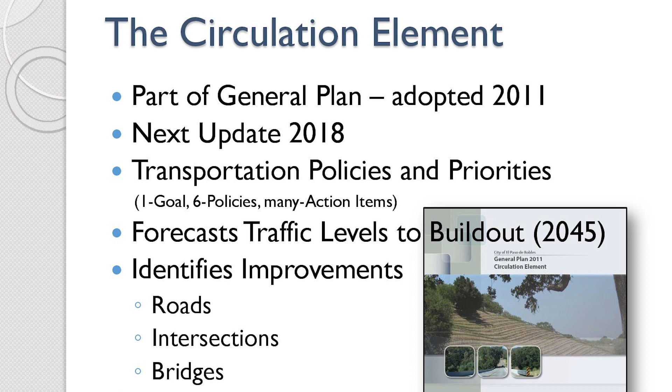So the circulation element also forecasts traffic levels to build out. We look at the baseline. Today is the baseline—actually it was last year. 2017 is our baseline. We did traffic counts throughout the city.

We're going to take those traffic counts, the number of trips per day, how many times you folks all go around and do your daily business, and we stick those in our traffic model, and we look at how that traffic is going to grow into the future. And so we've done that now, and we've done it out to 2045.

And then really we do that so we can identify higher level improvements, really the nodes, where do the big roads meet? Do we need intersection improvements? Do we need a roundabout? Do we need a bridge? Do we need a 4-lane road? Those kinds of things. So we can look at what needs to be done in the future and plan for it.

And then also the traffic circulation element really looks at multiple modes of travel. As I mentioned before, pedestrians, bicyclists—you've all seen bike lanes. You've all seen where we've widened roads, those different kinds of center turn lanes, traffic signals—that would come out of that.

So, as I mentioned before, we forecast future traffic. So these are our major city roads, and these are the major segments on those roads. And we have year 2017 and year 2045. So we're looking out in the future, really at what needs to be done.

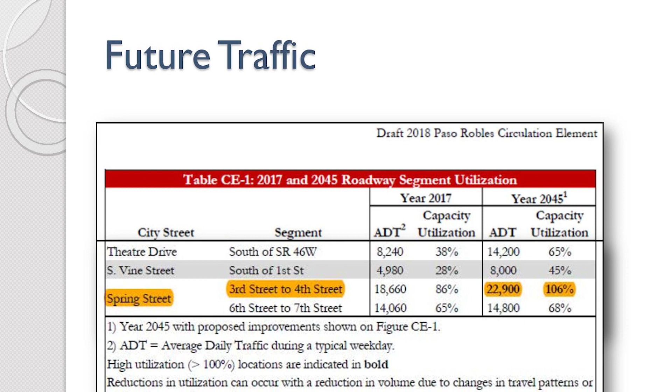So far, our single street that is going to exceed capacity by 2045 is Spring Street between 3rd and 4th. That makes sense because we have a major exit coming off Highway 101, and Niblick Road, with all the folks coming to the west side to get on 101 or to come downtown. We use this as a forecast tool to figure out what we need to do to this road segment or any road segment in the city, and we'll keep doing this every 5 years.

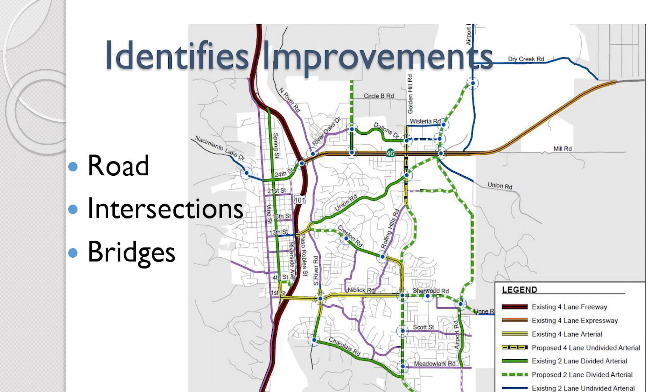The other thing, as I mentioned before and Warren touched on, is that the circulation element identifies improvements that are needed, and we look at it from that higher level. These roads you see here are mostly arterials and collectors. Arterials carry the heaviest traffic volume, like Niblick Road and Creston Road. It also has collectors such as Scott Street, Meadowlark Road, anything in blue, Rolling Hills Road, Wisteria Road, River Oaks Drive. Those are collectors—they collect all the local streets and funnel the traffic to the arterials.

So we look at that and identify where our major collectors and arterials are, and then we also look at the nodes, because usually your road segment isn't the problem—usually it's your intersection. We've all sat at signals, sat at a stop sign, and experienced that delay, that discomfort of not moving forward with our vehicle.

So the circulation element helps us identify all these areas that we need to fix, and from that we come up with a project list. That project list allows us to develop a fee schedule for figuring out what existing citizens' fair share of the improvements are, and what future development's fair share is. But before I get to how we look at fees and how we pay for road improvements, I want to talk about common questions that I've heard.

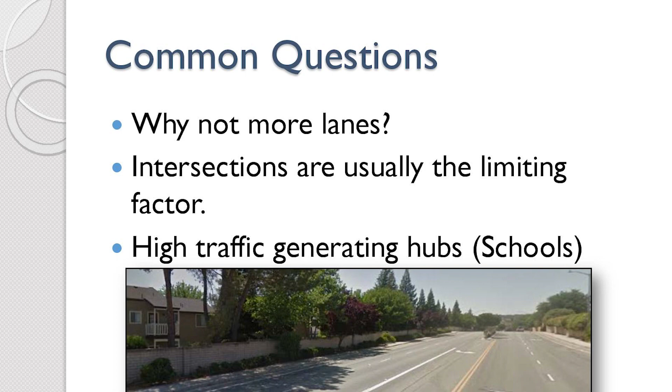Why not more lanes? Let's just make everything 4 lanes and we'll go on with life and everything will be great. That's a great question. In some cases that's a good solution when you have the land, typically in a greenfield type site where there's been no development. This picture here is a good example of a challenge with adding more lanes.

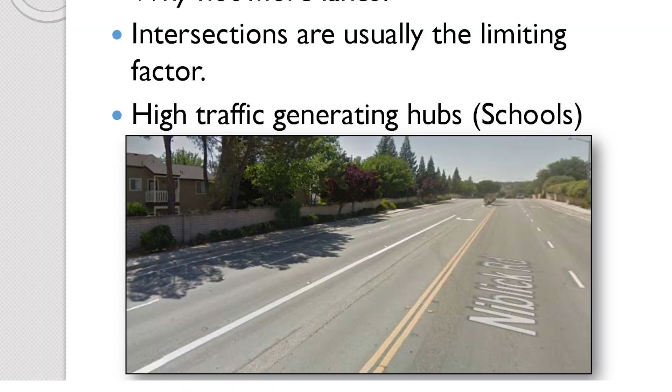This is Niblick Road, with a wall along it, sidewalk and a wall, built out. This road is built out in this section. We have housing here with small backyards, typically 10 to 15 feet. So why not put 2 more lanes on Niblick Road? Well, the challenge is we would have to buy that land from a landowner, and a lot of times it's Mrs. Jones's daisies that we're buying, and it's significant to the landowner because it either takes their backyard or in some cases could even take their house.

A lot of times we find that maybe it's just certain times of the day. Like on Niblick Road, 2/3 of your morning traffic near the high school is high school related, period—we've done the counts, we know that. So really widening the road based on that traffic impact doesn't make sense. It makes more sense to go for lower hanging fruit, something a lot less expensive to do, like busing students, encouraging them to walk or ride their bike to school, maybe a bike path to school, before you dive into widening roads.

As a traffic engineer, you also look at how many cars are actually using these roads. A 2-lane road, that's 1 lane in either direction, will carry about 24,000 cars per day efficiently, before you have to really start thinking about adding lanes or figuring out something else to improve efficiency there.

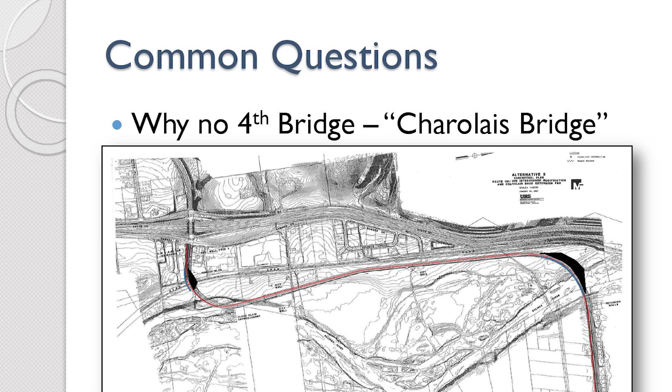So another common question is why no fourth bridge? What about Charolais Bridge? I've heard a lot about Charolais Bridge. How come you're not building Charolais Bridge? That's actually a really good question.

So Charolais Bridge was scheduled to go in or be looked at. This is Charolais Road here. This is South River Road. Niblick Bridge is just to the north. This is the Highway 46 West interchange.

So we'd have to get traffic from this location at the intersection down to the river, across the river, a new road all the way down to just past the brewery area, the rental area, Quinn Rental I believe is in here. Across the tracks, it would have to be grade separated, meaning going up and over the tracks or under the tracks. The railroad would never let us have an at-grade crossing like we have downtown.

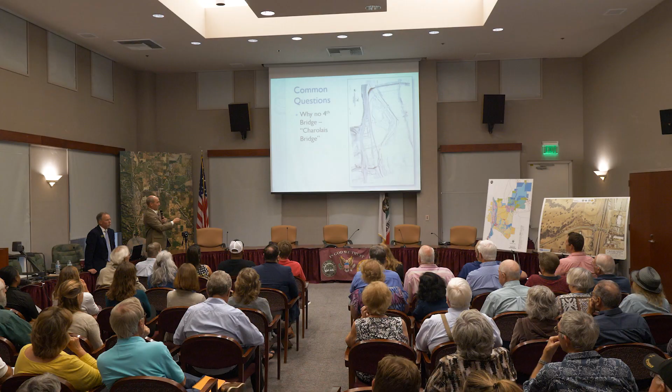Looking at that back in the 2000s, the city decided this wasn't feasible for a couple of reasons. One, there were archaeological impacts along the river. There were major environmental impacts along the river at both locations. You see the road here encroaches into the Salinas River. And the bridge was very expensive.

The city studied 3 different alternatives, and it's my understanding the cost exceeded $200 million. That's a heavy tax burden on the city to pay for, since that would be the city's responsibility. It'd be really hard pressed to get grants or Caltrans to participate in that kind of fix. So back in the 2000s, the decision was made to remove the Charolais Bridge because it just wasn't feasible fiscally and environmentally. That's been removed from the circulation element.

So another common question: what about those housing tracts? Aren't they going to cause tons of impacts and make my daily commute worse? My commute's already bad, I get that. One of the things the different specific plans, Beechwood, Olson, Chandler, any of these big projects, have to do is a traffic impact study as part of their environmental impact report.

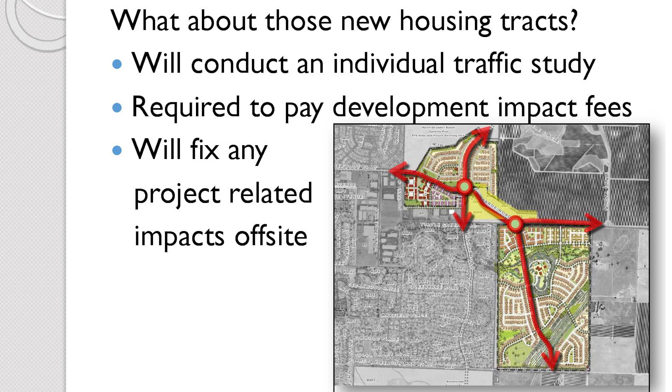From that traffic impact report, the traffic engineer will make recommendations. Hey, we think you have a problem at Creston Road and Niblick Road at that intersection. So one option there, just theoretical, could be widening that intersection, adding right turn lanes.

Out of the traffic impact report will come mitigations, and the project will be responsible in some form to fix those mitigations or impacts. You can't just build houses on that grand of a scale and not mitigate your impact from that. I want to make everybody clear that as those projects move forward, they'll have to do mitigations at some point in the project. It might not be right at the start, it could be halfway through, or 3/4 of the way through. But at some point, they will have to do mitigations to address their traffic impacts within the city.

So getting back to paying for it, how do we pay for it? Well, I think you all know it's your taxes, and some of it is also fees that the city collects. We get gas tax, state and federal funding, use the general fund, and those all go into city capital improvement projects—the projects the city does to improve an intersection, install a roundabout, put in a right turn lane, whatever it is. Private projects are also responsible for some of the signals you see in the city.

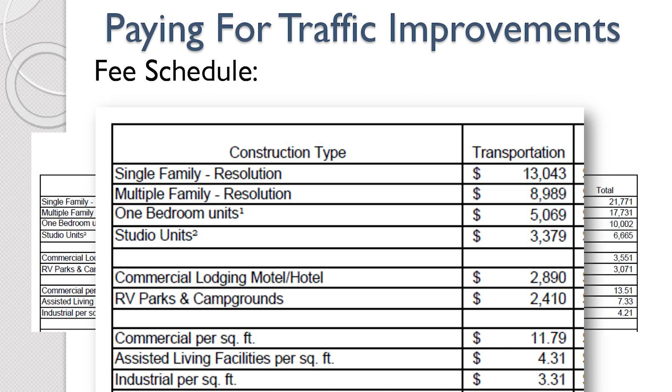We also have fees for 1-bedroom units, studios, and commercial. So if you come in with a food establishment, you want to open a soccer store, auto parts store, something like that, you'd pay $11.79 a square foot. So the fee really is related to how much traffic you generate — that's really the point I want to make here.

So now I want to talk about two of the interchanges that we're looking at right now that the city is actively working on, and really explain what we're doing on the north end of town and the south end of town, because we've talked about the middle a little bit already.

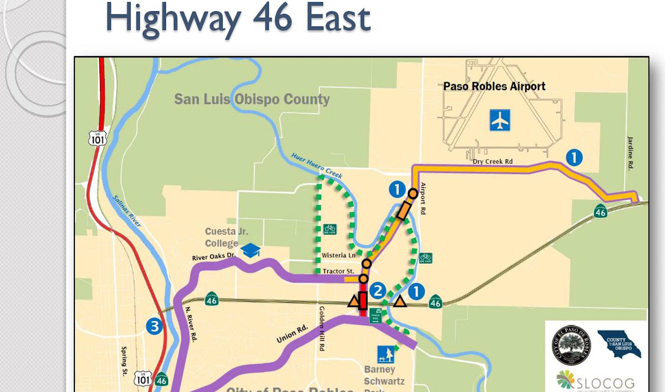This is a map of what we call the parallel routes. What we're trying to achieve here is give folks options of not just using Highway 46 to get into town, but actually have separate options to come in on River Oaks Drive, Dallons to River Oaks Drive, and also come in on Union Road and cross to Creston Road, or come down and go over to Niblick Road and access the commercial areas over there. Just giving folks another route to go.

Part of this plan is to create a new Airport Road. Folks have probably been on Airport Road before, about 5 o'clock in the afternoon — you don't want to turn left or right because you may be stuck in a queue for a while. We know that's a deficiency here, and we've been working with Caltrans.

This is where Airport Road is and the Ravine Water Park. The city currently has plans to repair Dry Creek Road to Airport Road, and then once you get onto Airport Road, we'd have a new roundabout at this location. So you can still use the old Airport Road down this direction, but we'd have a bridge across the Huer Huero at this location. There's a developer who's putting together an industrial tract here who will be building this section of road.

And then we will be connecting to that parallel route at this location at Tractor — that's the current plan. Currently the city is working with Caltrans directly on a new overpass over Highway 46, so we can get people from the airport over Highway 46 without ever having to deal with Highway 46 or the right turn at Airport Road. This will really give us a new set of routes to the airport in this area, and really open this up for better commercial development in the future.

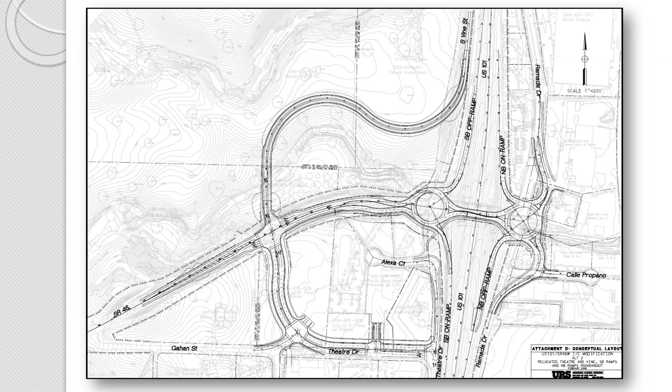So we are looking at single lane roundabouts, because the bridge was eliminated separately—not because of this project, but because of the bridge being eliminated. These can now possibly go to single lane, much smaller, much less land take, much easier to build, a much more robust solution for this whole area. So we are working on that. There is progress; we are providing traffic data to the county and Caltrans, and this project is moving forward.

So if you want, you can go home tonight and look at our website. We're going to have our draft plan up there shortly, along with the agenda for the meeting—I couldn't think of it. Here I am, government, and I don't know the agenda for the meeting. But you're welcome to come and participate. It's an open public meeting.

I want to talk a little bit about the Creston Road project. That was one that was successful, and we had lots of citizens turn out for it. We also have the Niblick Road corridor plan coming up, and specific plans you can be involved in. Creston Road was really successful—we had lots of folks come out from the community. This was led by Ditas Esperanza, very successful.

We looked at Creston Road and came up with an overall plan for the road based on the projected traffic in the future and traffic now. We basically came up with some good solutions: a roundabout at Rolling Hills Road, several locations with existing signals, a new signal at the Walnut Drive area, remaining 5 lanes, keeping 3 lanes here and 5 lanes back here, and widening this section. So with your participation, we came up with this plan.

That's why it's important, and I encourage you to come out for our next one, which is the Niblick Road corridor plan. The state gave us a grant. As I mentioned before, Niblick Road is basically built out—it's 4 lanes with center turn lanes and some 2-way turn lanes.

Soon—I haven't announced it yet because I'm still getting approval from Caltrans on the grant—but we will be running the same type of public input process. We're going to go out to solicit input from the public, neighboring landowners, the school district, and commercial businesses along the corridor about what they see and what they would like for Niblick Road. Our idea is to have a host of solutions for the city, cheap to expensive, easy to hard. Out of that matrix will come a list of projects we can implement in the future. So if you're interested, please come and get involved.